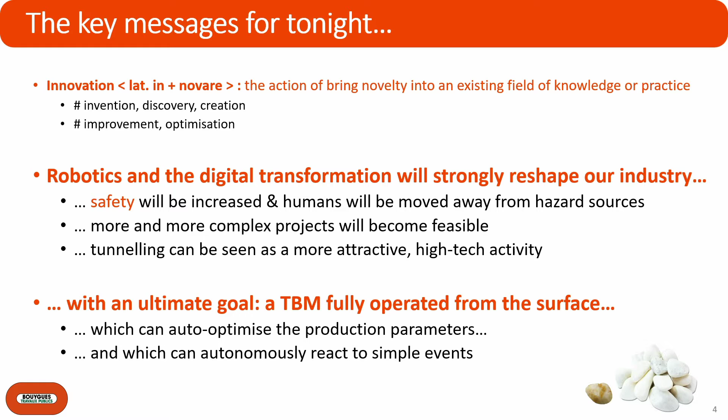When I joined Bouygues in 2009 in Flamanville on the nuclear power plant, there was one robot on site. One robot used to grind the concrete walls, to help the operators grind high walls. And it was like the robot. Everybody wanted to see the robot. It was the only thing that people remember from that site. Now, it can be seen that we actually have plenty of robots on site. It's becoming more and more common. So we will see the consequences of that evolution.

We will start with a bit of history, very, very short, but to show you that there is a continuing trend up to now of mechanization and industrialization of this industry. Then we will go through three categories of innovations. First, you cannot innovate if you don't have complete mastery of your core business, your core area of knowledge, know-how, etc. So we will start by improving all the tools that we've got now.

Then, the second kind of innovation, we will try and innovate using other technologies that already exist, but in other fields of the industry. A short break, we will go to Hong Kong, to see how we implemented that on the cross passages of the Cheung Sha Wan project.

And then we will go to another kind of innovations, which are more like breakthroughs or game-changing innovations, which will start a new field of research, of experimentation, because they bring something radically different. And I will give a quick word on the big data, which is kind of a trendy word now, but from this perspective of autonomous TBM, what it means for us in this very specific context, because many people are working on the big data at the moment, and some perspectives at the end.

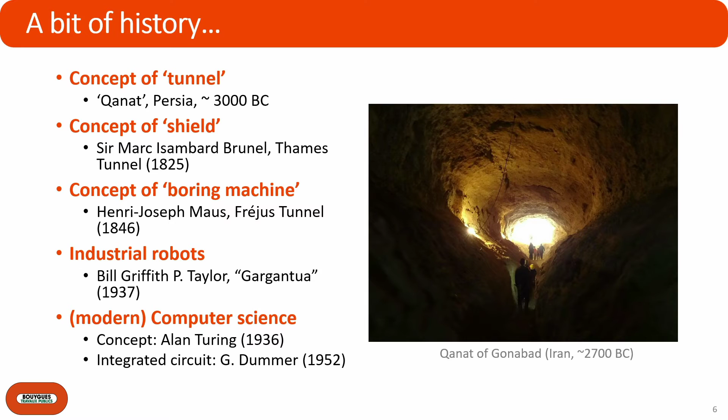If you look at the original shield, this is the well-known image from Brunel's shield for the Thames Tunnel. And another attempt at a TBM that was originally designed to go underneath the Mont Fréjus between France and Italy in the mid-1840s. You can see that our TBMs today are not drastically different. The concept has not changed much because the problem is the same. You need to support the ground, you need to progress, excavate, install a lining, walls, a roof, and stay safe inside.

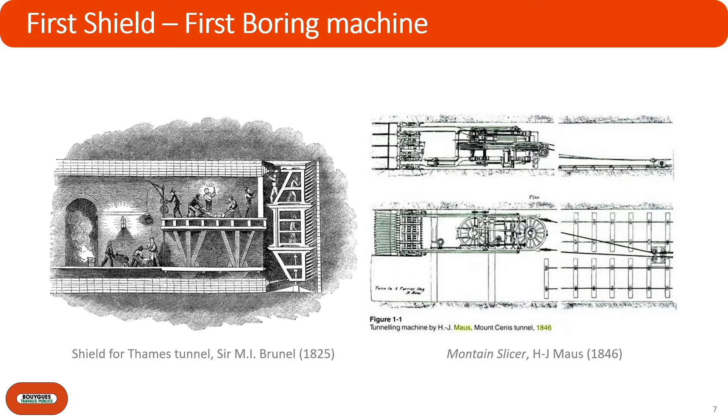In the domain of robots, the evolution is a bit more recent, but the trend is the same. This is a very interesting robot that was constructed quite a long time ago, actually, and it's the very first programmable robot, using the same concept as the player pianos with the paper rolls with the holes in them, designed to assemble bricks in a certain order and build a wall. We'll come back to that later in the presentation.

And for computers, a recent study has shown that the raw computing power of computers, I'm not talking about creativity or ability to learn, but computational power, is somewhere between the mouse and us. So, above the mouse, that's good, but it's getting closer to us. So it's a good time to ask ourselves how we can start working with robots that will be or are already as powerful as us, because we might be able to find a new way to share the tasks.

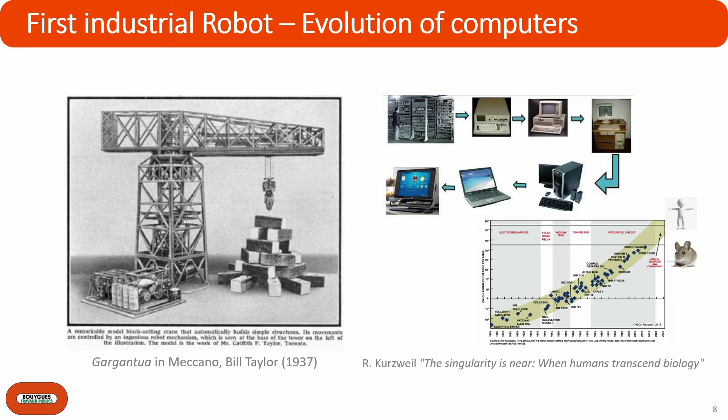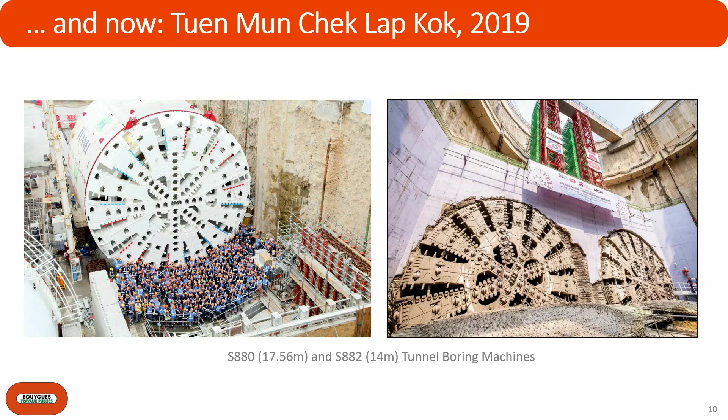Now, obviously, the scale has changed. The machines have become huge. You've all probably seen the S880 from Herrenknecht, and its twin, a sister TBM, which just completed their drives 5 months ago in Hong Kong. So the TBMs are much larger. They go much deeper in soft ground, and operating these machines has become more complex as a consequence. It's not anymore a guy sitting on an excavator. It's a real factory with all the equipment operated underground.

And if we want to continue the evolution towards deeper tunnels, larger tunnels, more complex tunnels, and try and reach under urban areas as well with the control of the settlements, we will need to keep on improving our machines.

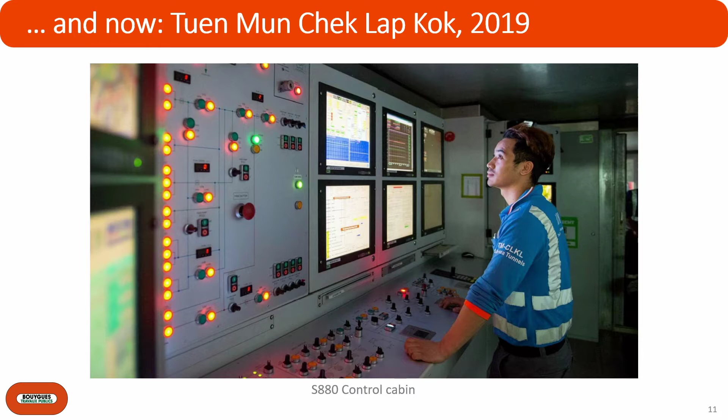So it's clear that our industry inherits from this very long tradition. Now the question is, how do we use or make the best use of the recent advances to make our TBMs better, or to help us with the operation of our TBMs?

The first kind of innovation is the improvement of our existing tools. To streamline the construction of the tunnels, we've developed over the years many tools, but it's important to keep them up to date so that they follow all the developments of the new techniques that appear continuously.

You will see a software suite, Pyxis, CATSBY, and SHIVA, I will explain later, and our cutter discs with the instruments on them, MOBYDICK. I will try not only to describe each and every tool like a catalog of all the innovations, I will try to explain to you why everything that we've developed over the past 30, 25 years can now be integrated in this quest for the autonomous TBM.

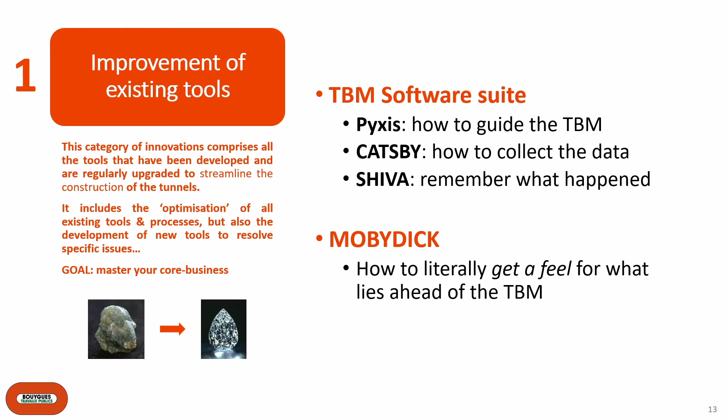The guiding system, it's very important to be able to guide the TBM because it's essentially blind when it's underground. So, what have we got? We have reference points at the surface and/or in the shaft, in the break-in shaft at the beginning, and then we need to rely on laser pointers, laser targets to guide our TBM.

The TBM is continuously moving, first because we intentionally make it move, but also because it has to react to the environment, to the ground. Sometimes it's pushed back by water pressure, pushed aside by a boulder, rock. You need to be able not only to steer it, but also to catch up with the theoretical alignment if the machine is not going where you would like it to go.

This Pyxis system, over the past 25 years, has been designed to help the TBM crew decide where to put the key segment. What I call the key segment is when you have a universal ring design, you have standard segments and the key segment with a taper. Depending on the location of the key segment, you can turn left, right, go up or down, or a combination of everything.

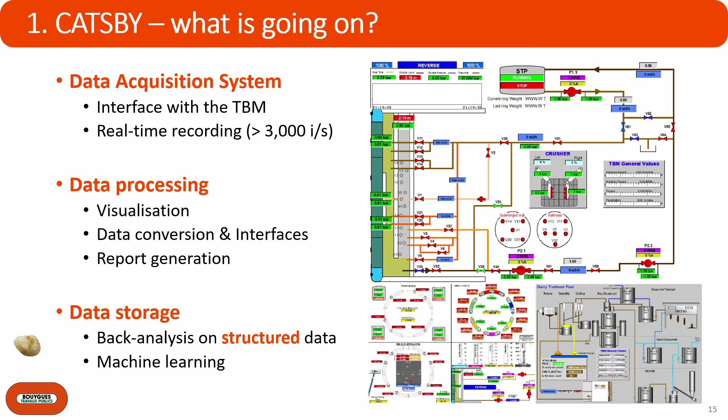This is the last bullet point here, the back analysis on structured data, so data in a standard format, stored always in the same manner for machine learning. We will come to that at the end of this presentation.

More and more the clients, the engineers, the designers are working with platforms or interfaces that make it easier to control or just to know what happens on site. So this data acquisition system must be able to give also human-friendly outputs, like for instance, where is your TBM? What are the main parameters that are used for the production? And generate as well reports, weekly reports, monthly reports at a certain frequency to know what is happening on site.

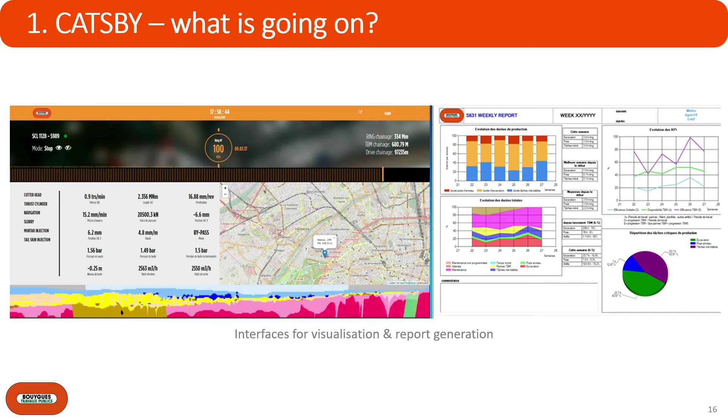Another example, you tell me why, but it's what happens during your shift. The shift, 8-hour shift, 10-hour shift, many things happen during the shift. And before, we asked the site engineer or the shift leader to write down after the end of the shift everything that happened in a notebook or on his computer, but it was written with his own words.

And not in a standard way, which made it very difficult afterwards to try and answer such questions as, for instance, what is the average duration of such a task, or average at what time do the crew members stop for, I don't know, the pipe, the extension of the slurry pipes, etc., because everyone was using a different language, sometimes even.

We decided now to use a tool that has a standard library of tasks for me to choose, and try and help as much as we can the people that just spend 10 hours in a tunnel, to make it as simple as possible for them.

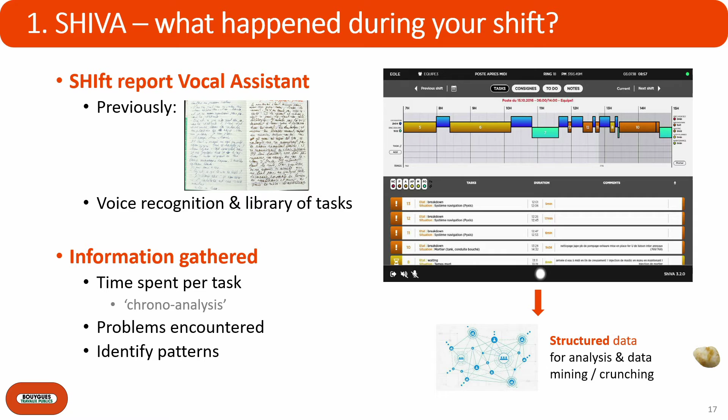But what is very important here, and also in the view of the autonomous TBM, is that a TBM, a machine, as intelligent as it can be, will never be able to use this. It needs something more structured and more standardized.

And lastly, for this section, the TBM is blind, as we said, or you have a class of technologies more using geophysics, I won't discuss that tonight. This is something else: it just literally feels the ground ahead of the TBM with instruments, so pressure sensors, temperature, rotation speed, force, etc., installed directly on the cutter disc, like inside the cutter disc.

And doing so, you're able to know, for instance, in a soft ground matrix, if you've hit a boulder, because when the cutter head is rotating, your cutter disc will see the ground, and you will see non-linearity or a change, a steep change in a value, which you need to explain afterwards. And since the cutter head is rotating 360 degrees, you end up having a complete mapping of the tunnel face.

In theory, it works well, and in practice, it works as well. We've used it also as a side effect.

We realized that it's also a good way to know the condition of the cutter head, because sometimes the value changes not because the ground is changing, but because your cutter head or your cutter disc is worn or worn out or damaged. So it is also a good tool for maintenance.

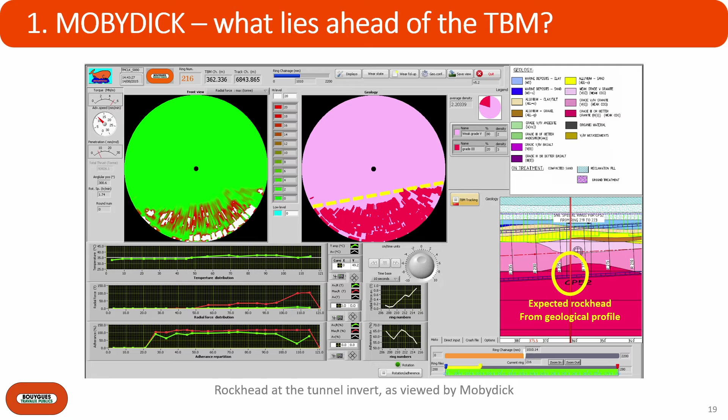So far, it was just improvement of existing tools. It's a first step, a very important step, because you cannot innovate until you're sure that what you do, you're doing it correctly. And what we've done here is not only improve our tools, but make our tools compatible, or ready, for the next step, which is autonomous machines.

Now we will go on to a second class of innovations, where sometimes the solution cannot be found in our own industry, and we need to look around in the neighboring fields of engineering and try to find solutions coming from others. I will take three examples of such innovations.

Some of you may have seen, even for the first ones, these names before, in other presentations, etc. I will try not to just do again a catalog of such tools, but just try to explain why now it will be integrated in a larger picture. Snake is a robotic arm designed to inspect and clean the cutter head.

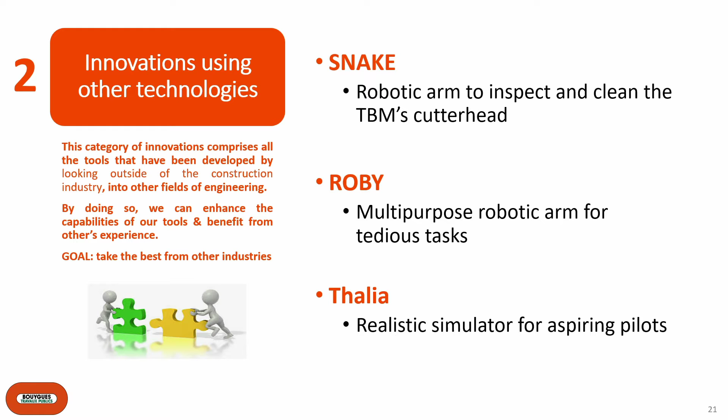Roby is a multi-purpose robot coming from the car industry that we use for tedious or cumbersome tasks. Thalia is our simulator that we have programmed to train our young pilots, TBM pilots.

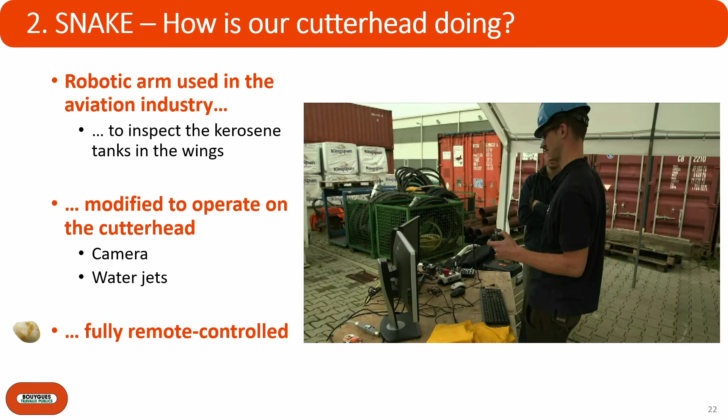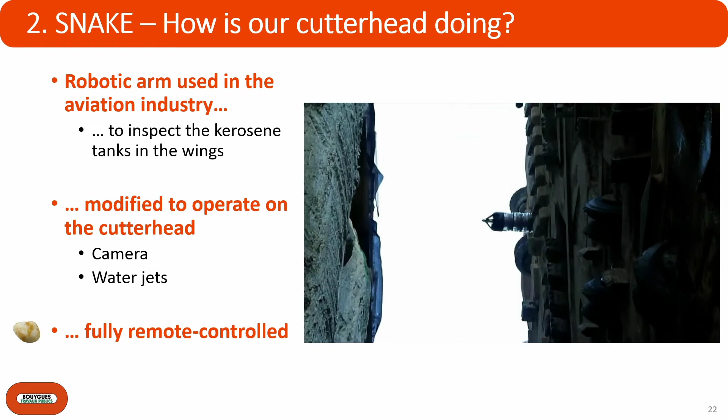Snake, those of you who have been involved in or interested in the Port of Miami project in the US, what was like 10 years ago, 8 years ago, have probably already seen Snake. It was our first real attempt at such a robot. We took a robotic arm that's used in the aviation industry to inspect the tanks located in the wings of the airplanes with the camera.

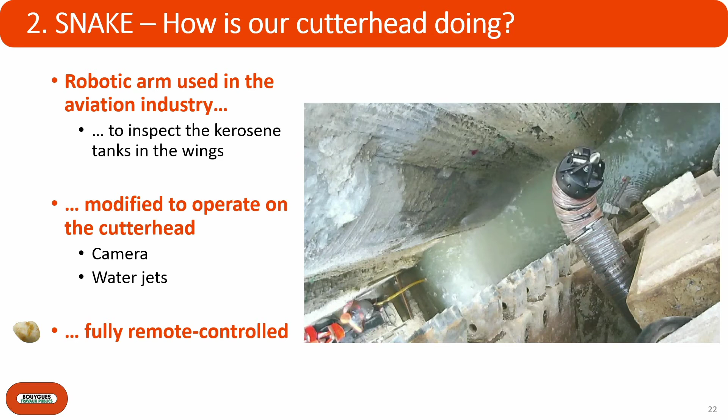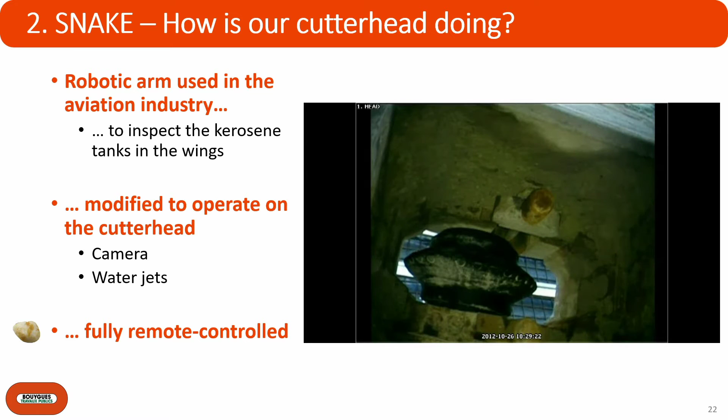This is before the break-in, so you can see the head wall. It's remote controlled, and it can go inside the cutter head chamber and also through the holes of the cutter head into the ground. The purpose of this robot was to inspect, see, check, and you will see in a minute, clean the cutter disc.

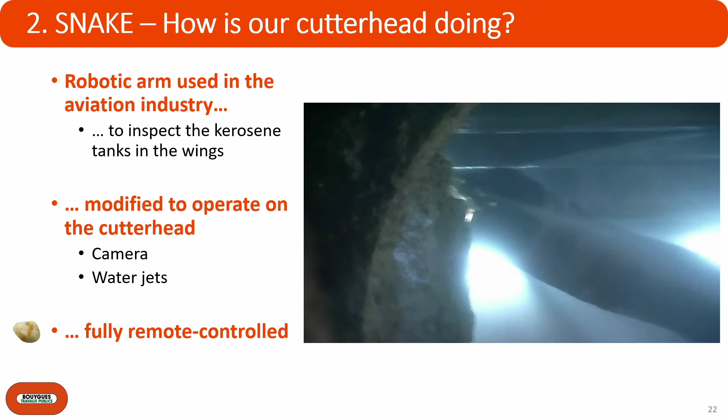It's equipped with water jets, 8 bar pressure, to clean or unclog the cutter head. And it's fully remote controlled from the cabin, which means that you don't need to send anybody inside the chamber to do this work.

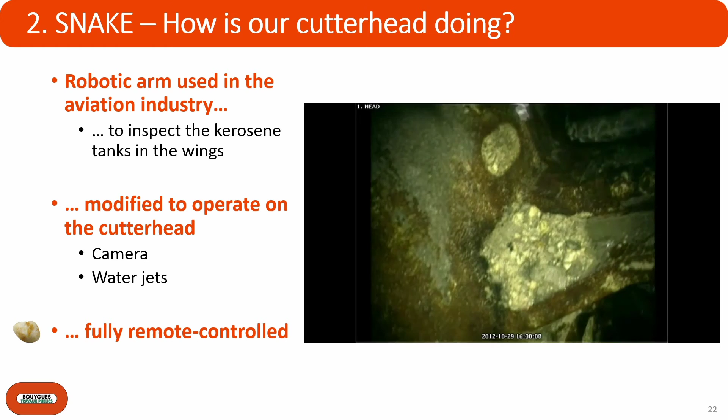A second example is Roby. This video here has been made on the Liantang project in Hong Kong. We had many holes to drill to install brackets. Using robots to drill holes is not new at all.

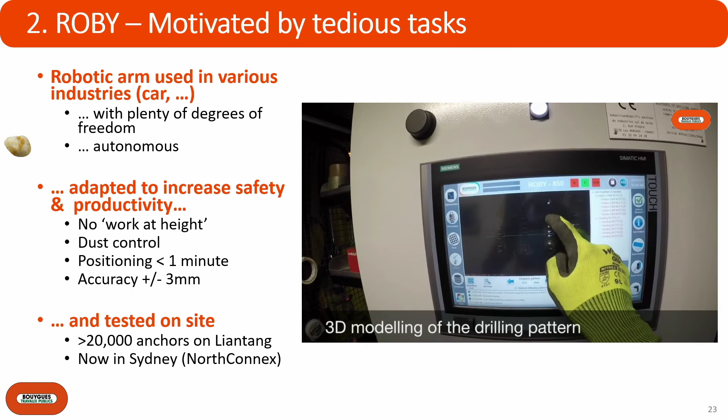What we wanted to do here is use a robot as autonomous as possible, which means that we wanted Roby to do its own survey first to know where it is, where it was. Then the drawings, the position of the dowels were input into the system, so he decided where to put the dowels.

Drilling, obviously, that's the whole point of having a robot, with absolutely zero human intervention. It's drilling the hole, sucking away the dust as well, cleaning the hole, and installing the dowel.

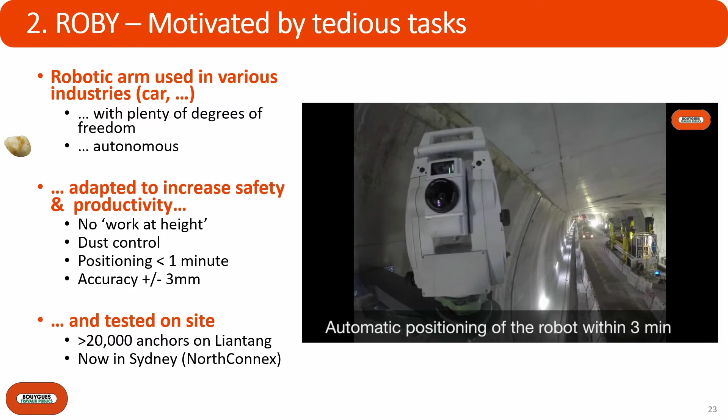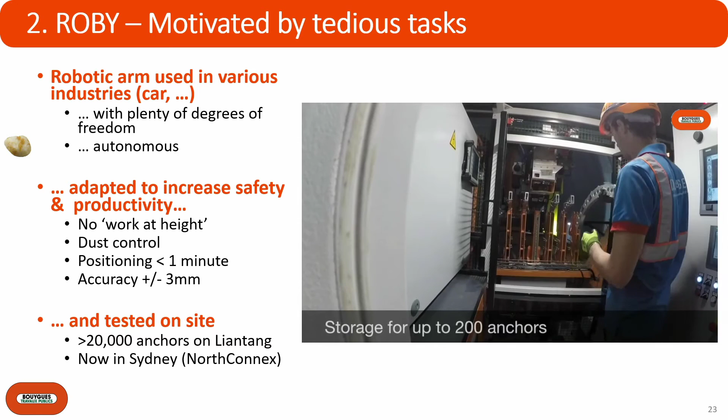In terms of safety, it's obvious that we have removed a work at height situation, and this task is not particularly motivating to do. The accuracy and the speed of the robot is comparable to or better than a human operator. The real breakthrough is that this robot never gets tired or never gets bored and just drills. We've done more than 20,000 holes on Liantang.

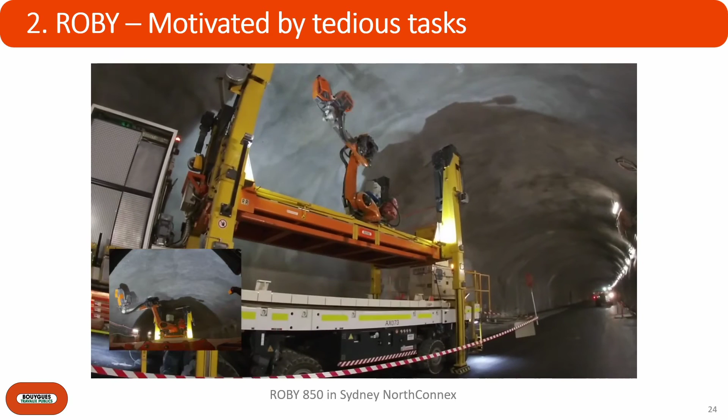The robot has now moved to Australia in Sydney for NorthConnex, the highway project in Sydney. In a different context, because now you see it's SCL mining, it's a traditional excavation tunnel with a shotcrete lining, but the concept is the same. If you need to drill holes, you just need to know where the anchors have to be, to tell ROBY where it has to go, and after that he will manage on its own.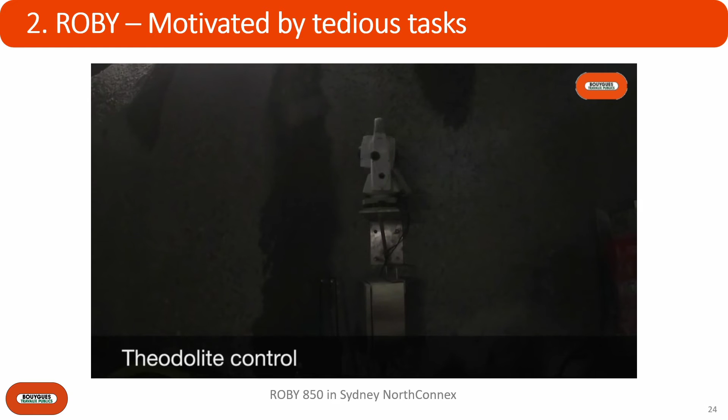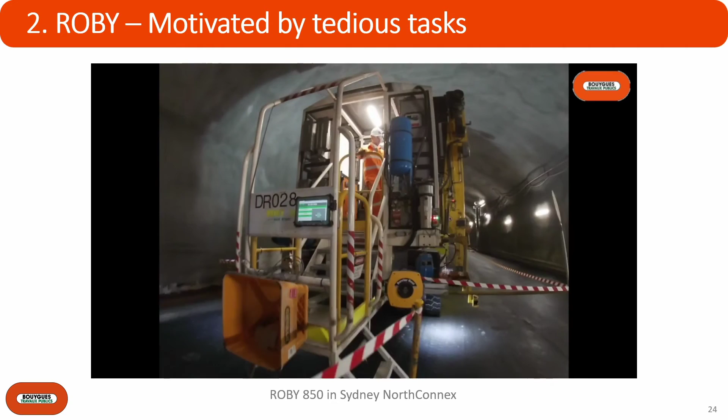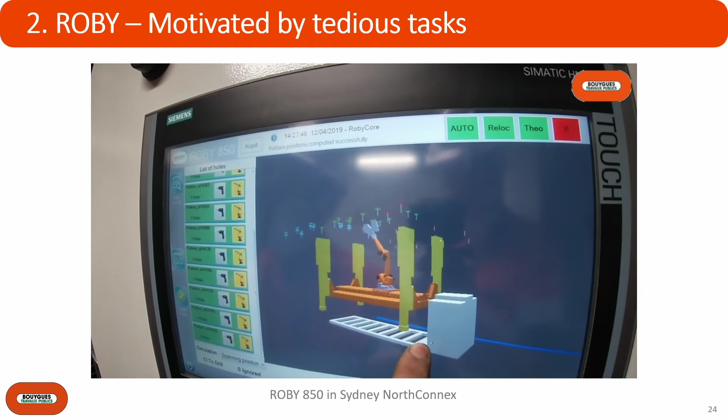A more general remark: when you need to compare productivity, it's not the productivity of the unit task. Drilling a hole depends more on the drill bit than on the robot or the human operator. But as a whole, if you have a robot, you save time on everything else - transition between shifts, lunchtime, dinner time, all the stops, etc. So overall, you go faster.

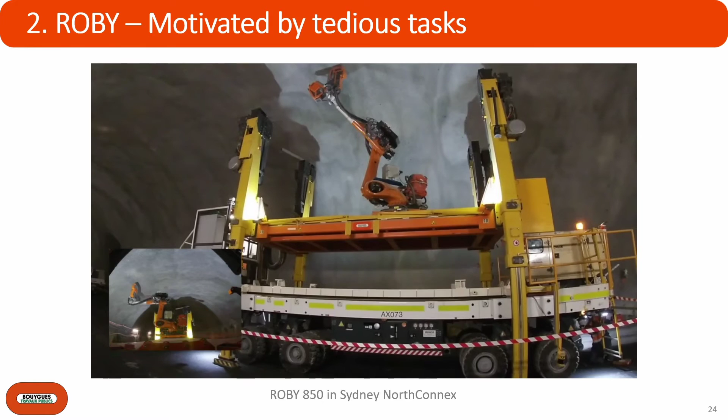The TBM simulator, again, this is an example of a partnership with a startup, a company specialized in simulation software for cars, planes, a lot of simulation software. We've asked them to help us develop a TBM simulator with a realistic command panel - by realistic, we mean very close to the actual one that pilots would have on a real TBM. Able to simulate all kinds of tunnel boring machines: earth pressure balance, slurry shield, slurry pressure, variable density.

Using, and that was very important for us, realistic scenarios - scenarios taken from our previous sites with the data collected by CATSB and all the tools that I've mentioned before, so that the training could be as realistic as possible.

A young pilot, before he's sent - especially now that we have a significant number of tunneling projects and not so many experienced pilots, so we need to train new pilots - will be able to get a first feel on how the machine is behaving, how you react to a certain event, etc., before he actually goes on site to operate a TBM.

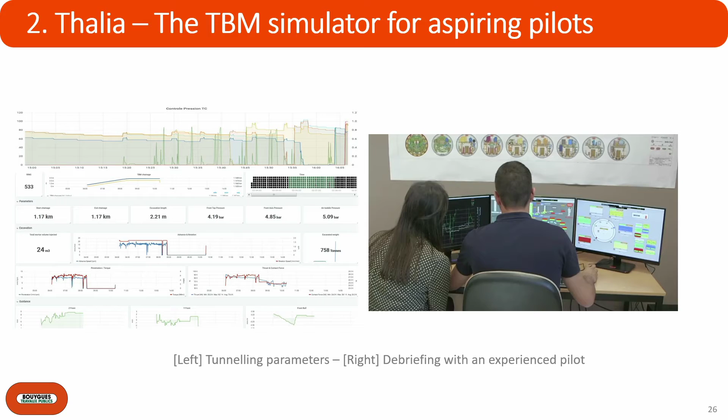So what are we seeing here? Sometimes we've taken from the outer world, let's say, ideas that we try to implement on a tunneling job. There is nothing new, there is nothing groundbreaking in itself here.

It's just that for a given problem, how do you find the solution that will best answer the question: first, improve the safety conditions on site, productivity as well, and be as autonomous, as industrialized as possible. And here, traditionally, the construction industry is a bit behind the other industries, so it's a good opportunity to catch up.

Now, as a short break, I would like to travel to Hong Kong and with you have a look at the cross passages of Tuen Mun. You've probably heard about the construction of these cross passages, because it was published and it's a good example of a situation where we didn't have any other choice than to innovate. And I will explain why in a minute.

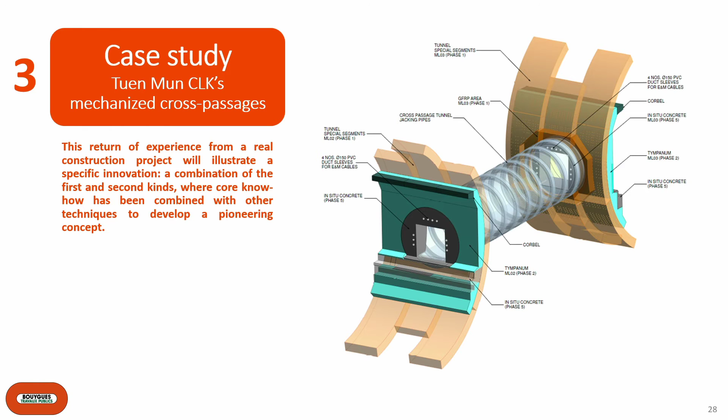You have two tunnels, and what I call cross passage is the structure that connects both tunnels for emergency egress of pedestrians in case of fire or accident. So, the context: Tuen Mun is a highway tunnel. You have two parallel tunnels from an extension of the Chek Lap Kok airport here to the New Territories at the north here in Tuen Mun. We had a significant number of cross passages because the tunnels are 5.8 kilometers long, and you had one emergency egress every 100 meters, which means 57 cross passages.

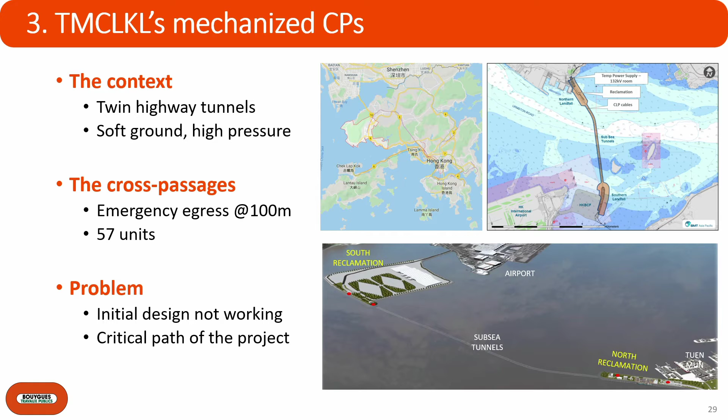And the problem, as you will see in a minute, is that the design that we had initially based our proposal on turned out not to be working. These are the two main tunnels with the carriageway, 2 lanes plus an emergency lane on the side, some equipment and ventilation underneath, ventilation at the tunnel crown, and cross passages.

So you see, we had quite a significant number, and the geological conditions are quite challenging. It's typical of Hong Kong. The bedrock is granite, but above that you have different layers of sediments, soft to very soft, highly permeable in this area, and up to 6.5 bars of water pressure below the sea. So two consequences. Below the sea means very, very limited access from the top. And second consequence, it's hopeless to pump, you know, dewatering.

So why wasn't the initial concept working? The initial concept was based on artificial ground freezing, which has been done before, which is a known technique. But when we sent the samples to the lab after the additional ground investigation campaign, it turned out that the mechanical tests, the uniaxial compressive strength on the frozen ground, was much lower than expected. I'm sure Stéphane remembers this bad surprise that we had when we opened the factual report.

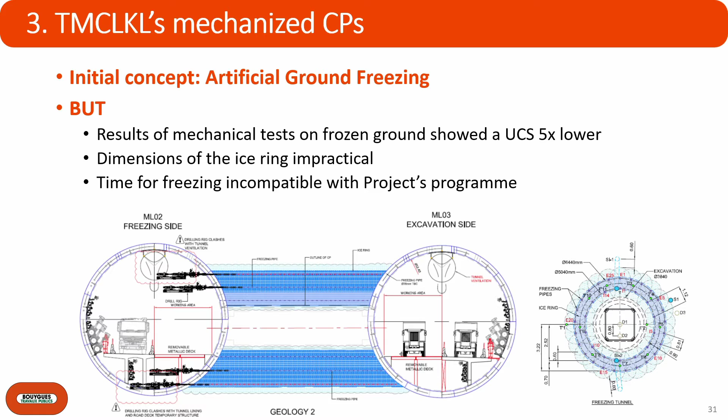Ideally, we wanted the temporary structures to be part of the permanent structure to avoid many operations of dismantling and reinstallation. And this is of paramount importance: we had to excavate the cross passages while the main tunnels were in operation, which means that we had to leave at all times half of the tunnel free for the logistics, for the vehicles feeding the main machines.

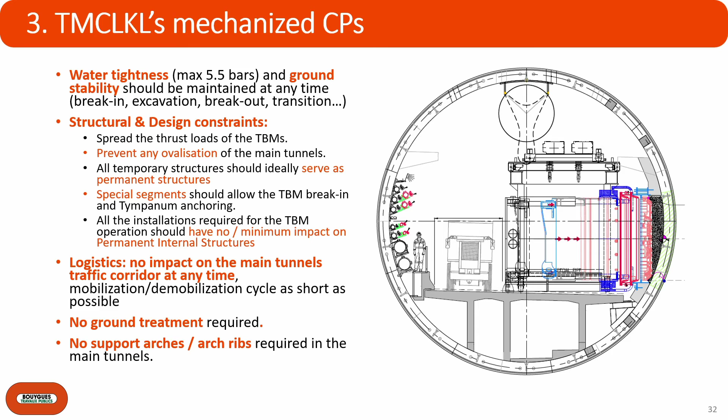So the new concept was, why couldn't we use the pipe jacking technique that is commonly used elsewhere, from shaft to shaft, for instance, but this time we could maybe use it from tunnel to tunnel. And the idea is to start from one side and push a pipe jacking machine, so a mini TBM, if you want, towards the other side, and retrieve it

in a steel bell under pressure, because here you have people working and you're under atmospheric pressure and you're connected to the surface. Here you're inside the ground, so you have your 5 bars of pressure on top in soft ground.

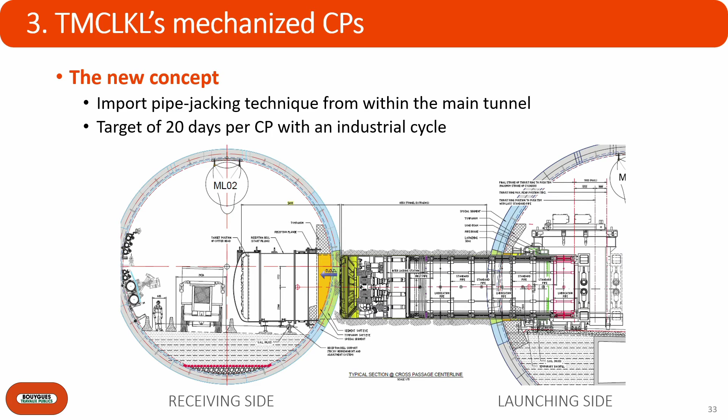What was the concept? So we had to provide a soft eye in the main tunnel lining. I will show that in the next slide, so that the pipe jacking machine can go through into the ground and on the other side as well.

And then to prevent or minimize the ovalization of the main tunnel, we decided to cast a reinforced concrete frame inside the tunnel that would act both as a temporary support and frame for the pipe jacking machine, which was anchored to this frame using 4 big steel plates to push the pipe jacking machine into the ground.

And the permanent lining of the cross passages was the reinforced concrete pipes themselves. So we said, doing so, we use all the temporary structures to already create the permanent cross passage at the end. What was really challenging, I won't talk too long about that, but the waterproofing system, because you can imagine that it's a junction point, and traditionally junction points are complicated to handle in terms of waterproofing.

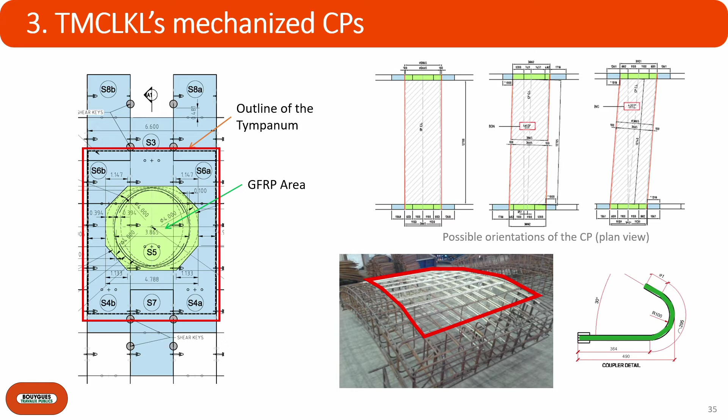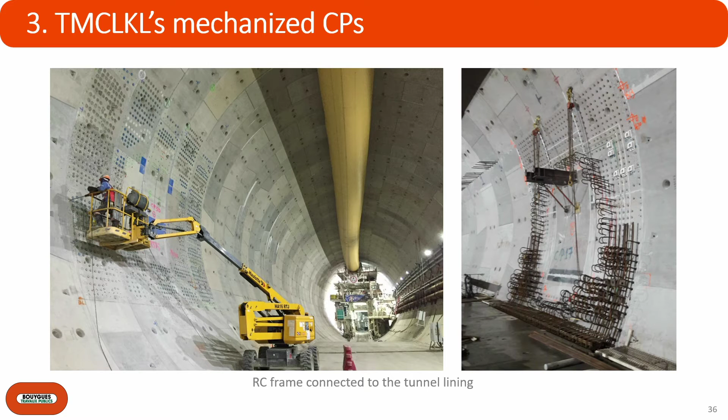CP. And we've used couplers embedded in the segments to connect to the structural frame, because we want everything to work together. Therefore, we had all these couplers embedded in the segments and pointing towards the intrados, on which we've connected rebars here and cast the frame. Here you can see the frame with the big plates. You have 2 out of 4. The big plates to anchor the pipe jacking machine. The flange at the first part of the steel structure for the pipe jacking operations.

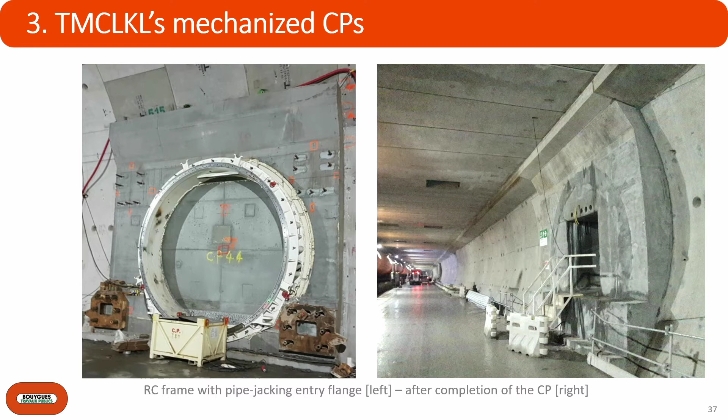The pipes, the concrete pipes, were brought using a flatbed truck, keeping at all times some space for the logistics. And the good thing with pipe jacking is that you have access to the tunnel, the cross passage, while it is being pushed or jacked.

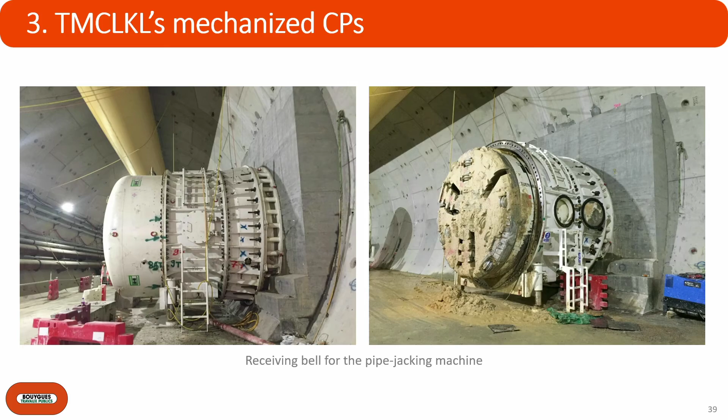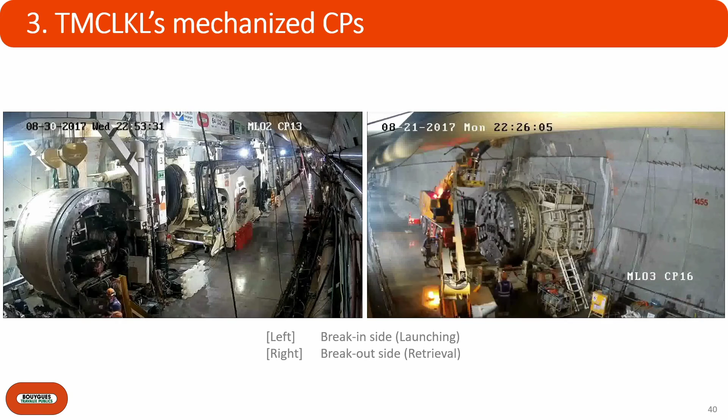And this was typically the case of innovation under constraints because we had, again, no other choice than to do something else than what was previously anticipated. So the innovation was more in the process, the assembly of bits and pieces from other areas into one solution.

It was made possible, now this is important, it was made possible through very sensible risk sharing with a motivated client. The client was in the same boat somehow because the solution was not working, but he needed his project done. So we came with this solution that had never been done before. We had some risks, obviously, and we had to convince him that we could manage those risks, that everyone had to do his best to take his share of the effort. And that's one of the key reasons why we were successful in developing this process.

As a result, we managed to do 42 cross passages with an average production cycle of 20 days, which is much faster than the 4 or 5 months that ground freezing would have required, with a record at 14 days. And we will use this technique on a new project that was just awarded recently in Hong Kong as well, which is called Trunk Road T2. Very similar project with cross passages every 100 meters as well. We will go for this solution as well.

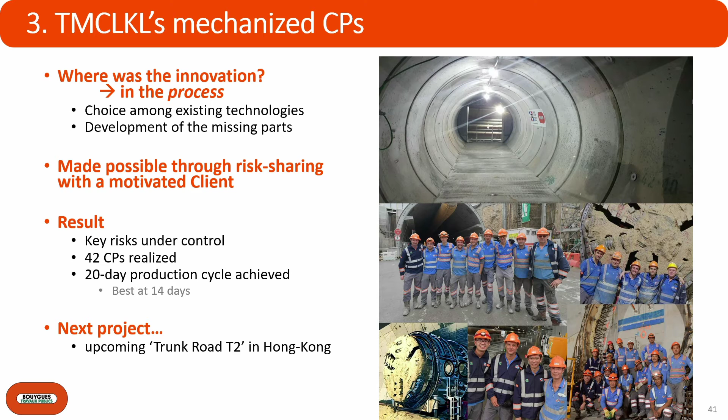So now back to our autonomous TBM. Now we will go to disruptive innovations, like breakthroughs or innovations of a different kind, innovation that will open a new field of experimentation and research. We will start with the continuous boring. By that I mean a TBM that is able to excavate at the same time as it is installing segments. It has been attempted before. I will discuss that in a minute. And it's feasible in other types of machines, but I'm talking about large TBMs for soft ground, slurry or EPB TBMs.

And two others, TELEMACH, a robotic arm to change the cutter discs without human intervention, and Atlas, the most recent one, the autonomous ring erection system. You will see that it has some similarities with the Meccano that we saw at the beginning.

Continuous boring, it has been attempted before. The limiting factor for continuous boring was the accuracy of the control of the hydraulic and oil systems for the thrust jacks and the computing time available on the machine. Because the main issue is that when you have your TBM in the ground, you will calculate the pressures in all your jacks so that it balances the forces coming from ahead, from the ground, from the water.

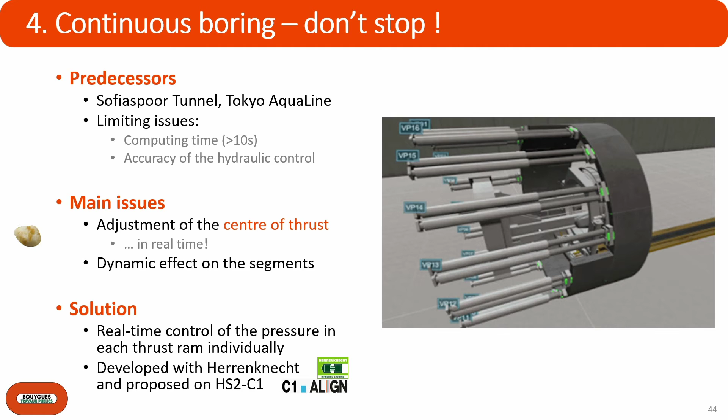It has become possible now because the computing time of the position of this center of thrust is now below a tenth of a second, where it was over 10 seconds 20 years ago. So now we can really speak about real time. So we can do that. And what is at stake is, in real time, you have your center of thrust here.

If it's on the bottom right-hand side, it means that I push more on the bottom right-hand side, so I want my TBM to go a bit to the top and a bit to the left. Okay? When I retract those two rams, I still want my center of thrust, the barycenter, at the same location, because I don't want my TBM suddenly to move in another direction, so I want to keep this, which means that I need to quickly calculate first the forces in the remaining jacks that are not retracted.

But not only calculate, we need to ask the system to change the pressure, the oil pressure, the hydraulic pressure, very quickly in those jacks. So it's not only just the computing time, it's also the accurate control of the hydraulic system. We'll see when the two machines on HS2 start. It will be a very, very nice field of experimentation.

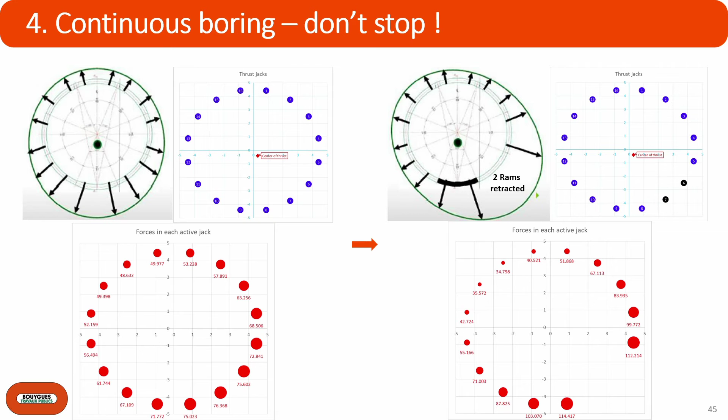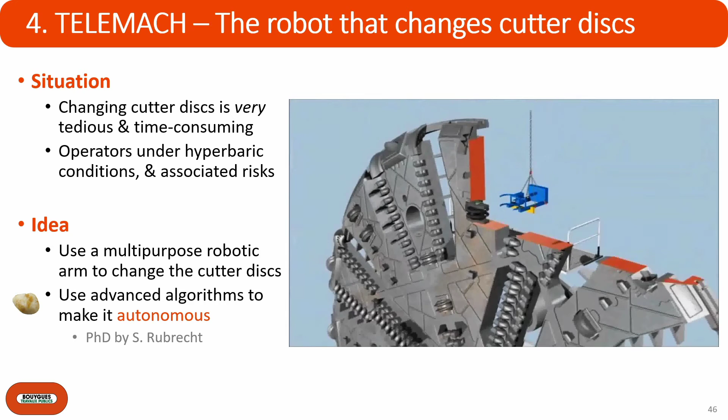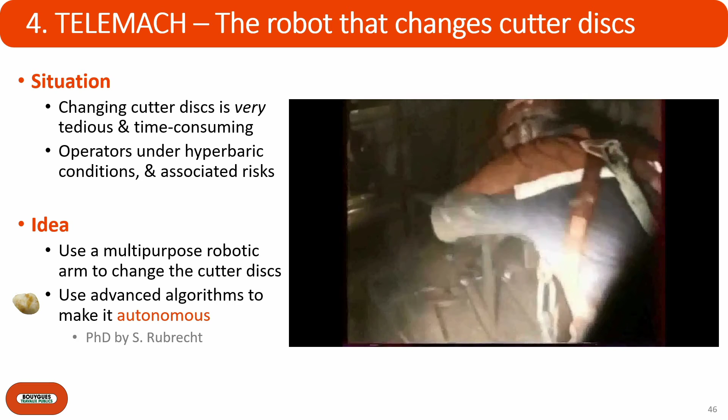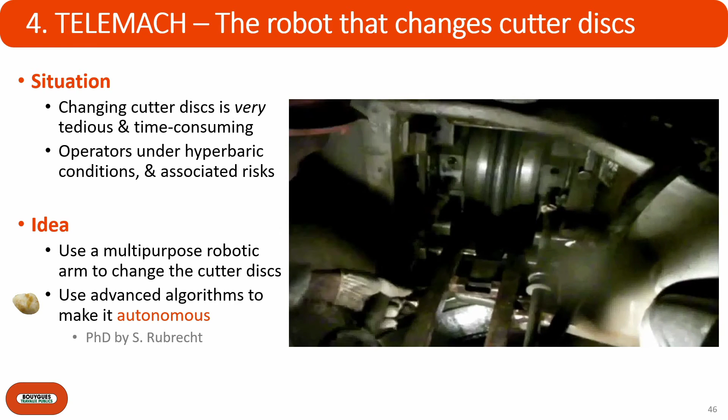Okay? That's the theory. In practice, it implies that you are working in the cutter head, so above 40, 45 degrees Celsius, humidity up to 100% sometimes, under pressure, it's a hyperbaric intervention, so 3, 4, 5 bars. You spend 2-3 hours changing one cutter disc. So when you have a full cutter head, so 80 to change, it takes a long time, even if you don't change them all at the same time, but still. So we say, okay, there must be a way to propose something else.

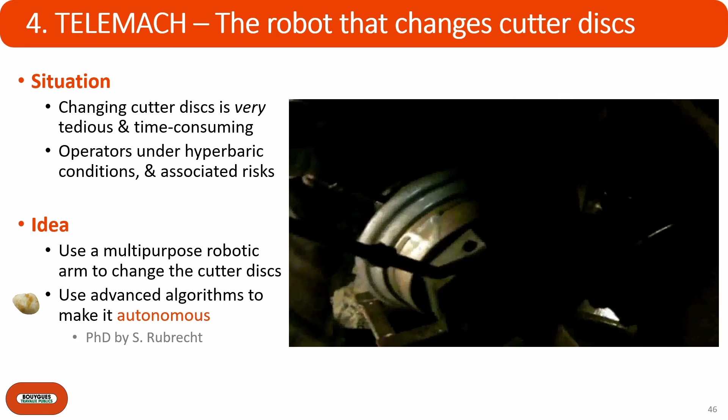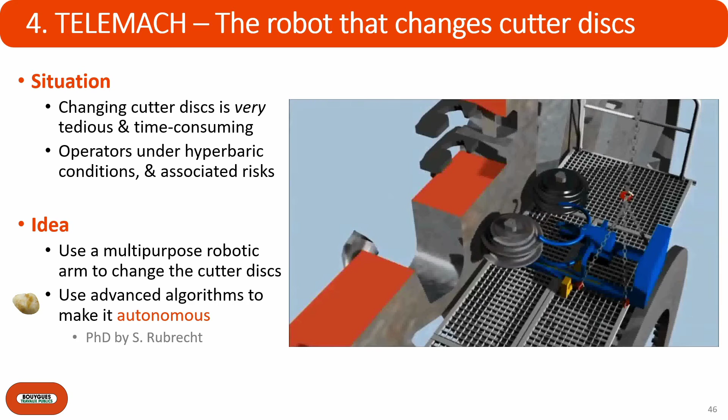Especially now, we like to remove, again, all the operators from risky situations. And a cutter disc like that can weigh up to 200, 250 kilos. So it's really hard work. What we've done, the robotic arm you've seen to drill the holes, we've taken the big brother, and we've developed something taking advantage of our machines being large

that is housed in a compartment inside the shield, the front shield, the front part of the TBM, able to go through a door, access the cutter head from behind, grasp a cutter disc, and replace it by a new one. So in theory, it's easy. It has to work in hyperbaric conditions, to be remote controlled from the control cabin under atmospheric conditions,

be ideally as fast as a human being, but if you manage to get all these safety improvements, you can tolerate that it's a little bit slower than a human operator, but the key improvements are no hyperbaric interventions, no people sent in the chamber, no work in confined space, and no handling of very heavy elements.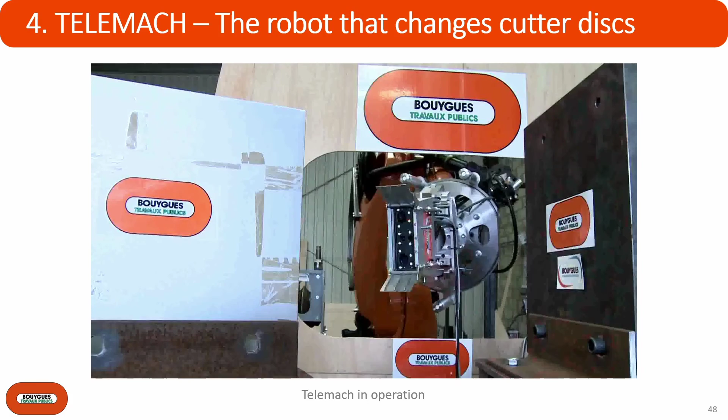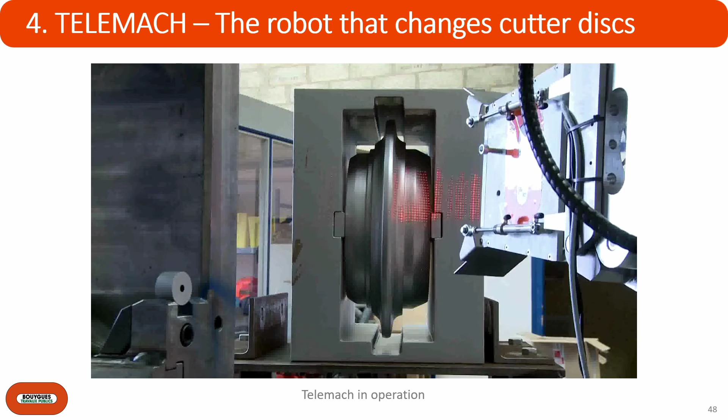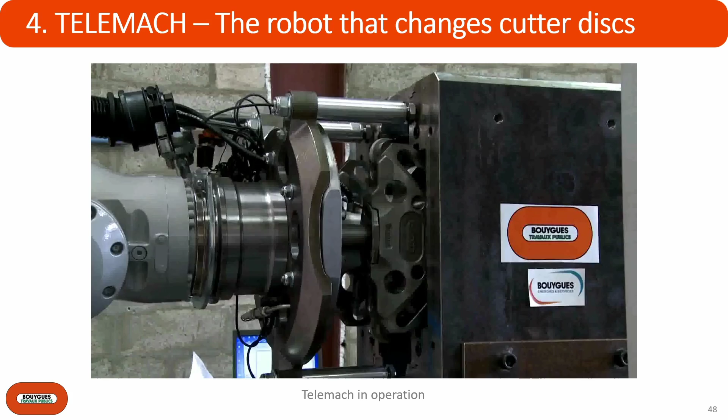This is the video of Telemach. This is in the factory during the commissioning, because in the real world you don't see really what happens, because to make the movie you would have to send ideally a person to make the movie, which is exactly what we try not to do. But you see the robot and all this study, the software, etc., takes advantage of all the latest technologies that we've got now. The BIM, the 3D models of the TBM, the cutter head, all the studies about kinematics and robotics, reverse kinematics.

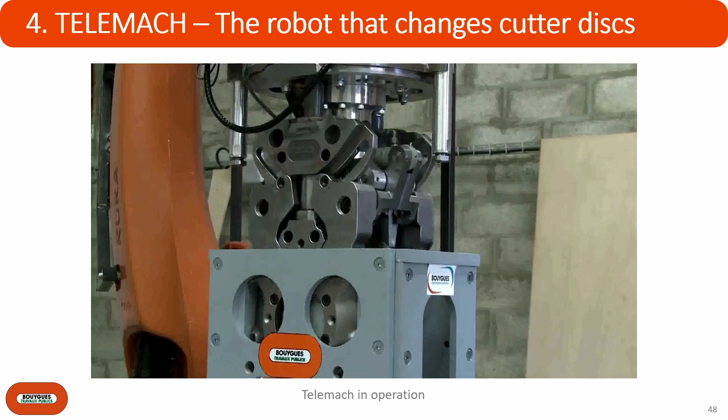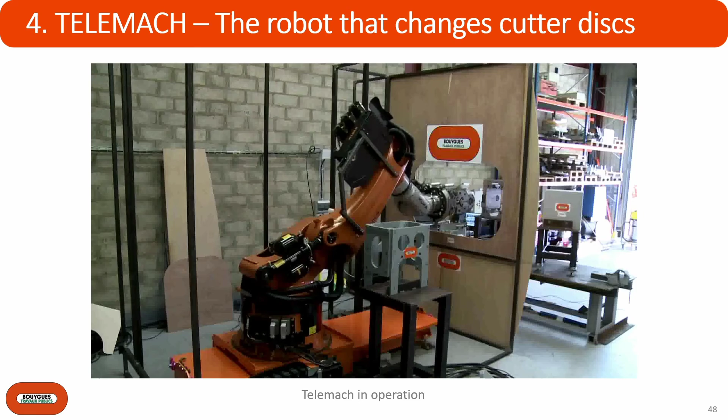So you don't control your robot by telling him, go to the left, go to the right, go up, go down. You just tell him, go there. And he will calculate with the position of the cutter head, etc., the best trajectory to arrive at its final destination. So virtually, you're just telling the robot, change cutter disc number 87, and it will manage the rest.

For that, we also had to develop a new cutter disc, because the cutter discs that I showed you in the previous video, suitable for manual handling, are not suitable for a robot. Therefore, we developed a cutter disc that is a bit more complicated, a bit heavier, but it's not a problem since it will be handled by a robot.

And the last innovation for today: we've talked a lot about excavation, the tools, the cutter heads, etc. What about the segments? Because a significant amount of time is spent erecting the segments. This is a video from the XRL820 project in Hong Kong, which was completed in 2013.

It was a standard erector, so remote control, with an operator here, who will just check that the segment is put in its correct position, check what we call gap, step, etc., orientation, and make sure that the lining is of good quality. What are not the issues, but the areas of improvement?

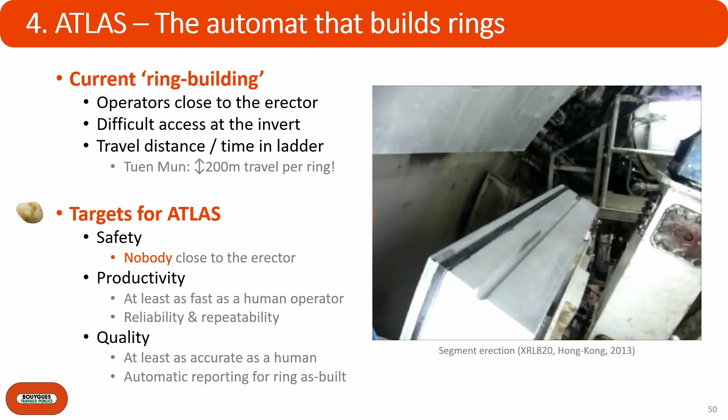The targets for Atlas were, in terms of safety, we wanted nobody close to the erector anymore. In terms of productivity, we don't want to lose time, obviously, so it has to be as fast as a human operator and as reliable. And in terms of quality, at least as accurate as a human.

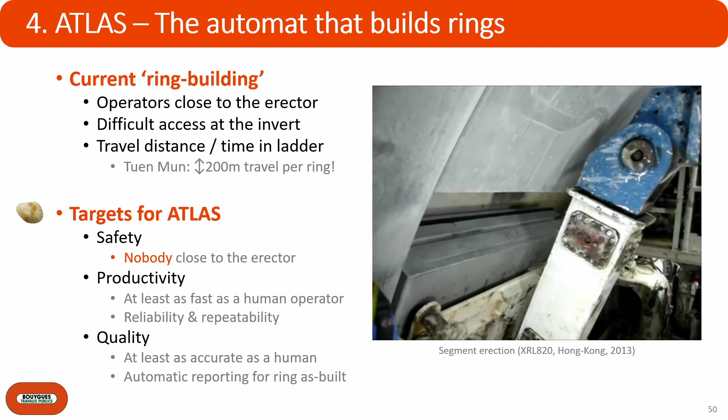It might seem strange to have a robot only as accurate, but actually, for example, a step between two segments, it's very easy to feel it with your hand. And the touch is very good at feeling very, very small differences. So a human operator is very good at ring building because it's easy to correct the small defects. So we want a good quality.

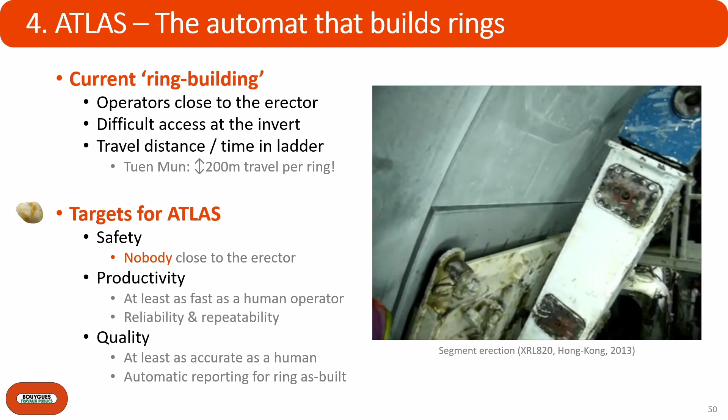And we said, okay, if a machine is doing the ring building, then we would like, during the ring building, to do the as-built at the same time, not send surveyors the day after or 2 weeks after, etc., to survey the ring. Take advantage of it being a machine, very accurate, as you'll see, to do the as-built straight away, straight after the segment has been placed.

The result is Atlas. At the moment, it has been installed on the EOLE project, part of the Grand Paris in France. Right now, it achieved 34 minutes per ring, so on average, 4 minutes and a half per segment, with a record at 3 minutes. A human operator is consistently between 32 and 36 minutes per ring. So it's as fast as an operator.

At the moment, it's not yet as reliable, but the target is to save 1 minute per segment and have a real gain in speed.

How does it work? Again, you have in 3D your TBM, your segments, the theoretical position of your segments. You have everything you need in a digital format. You just need to give, in a way, eyes or senses to your TBM, to the erector. So we have a number of lasers. You will see a video on the next slide. Lasers that actually look at the segments that come from the back, on the segment feeder, as it's called, this conveyor.

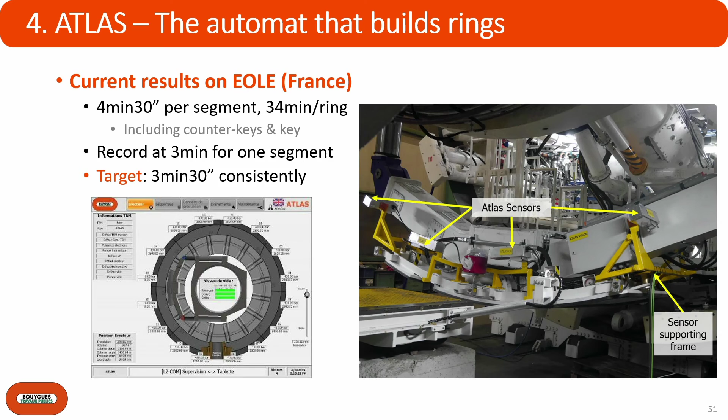On the left-hand side, this is the view from inside Atlas's mind, so it's the virtual representation of the tunnel that Atlas works with. On the right-hand side, this is Atlas actually working.

You see the lasers and the sensors installed on the erector.

We had to make a couple of adjustments on the design of the rings to make it suitable for Atlas. For instance, you will notice that we are no longer using segment bolts on our project. We've recently removed them from HS2 as well, from our project. We use dowels embedded in the segments. So once the segment is in place, they will stay forever, and they play exactly the same role as segment bolts, except that you don't need to send someone to bolt them and remove them at the end of the project, if required. So now we only have dowels, and also they act as centering pins to help Atlas install the segment at its location.

This has been made possible also because with the TBM manufacturers, we have worked together to integrate the machine in the 3D model, because obviously you don't want to hit the jacks or any other part of the TBM equipment with a heavy concrete segment.

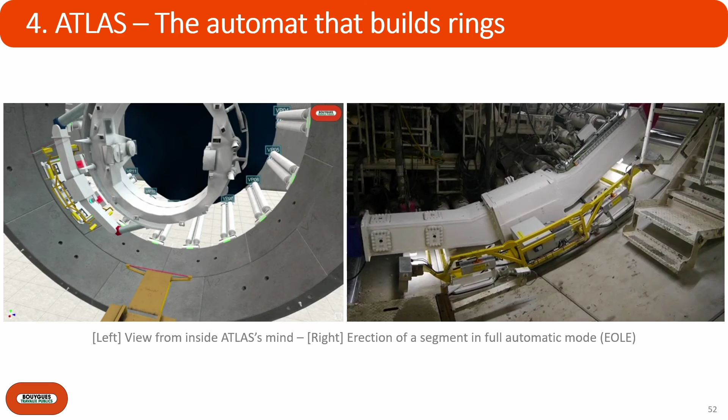So for those of you who are interested, feel free to go and visit EOLE or other projects. It will be a technique that will be tested all along the project there. This was for hardware, let's say, innovation in hardware, in tools, TBMs.

What about the software now? A very quick word on the big data. We are collecting a huge amount of data on our sites, as you know, and it's not only us. It's a general trend in the construction industry to have colossal amounts of data.

The thing is, now it's a very nice playground for all the new class of algorithms that have emerged in the past 5 years or so. Machine learning, you've probably heard such a term. Artificial intelligence is very broad, but this is the category of algorithm where you just feed the machine with raw data, but you don't guide the computer. You just tell it, try and find patterns, correlations, relationships between the variables on your own, and just tell me what you found afterwards.

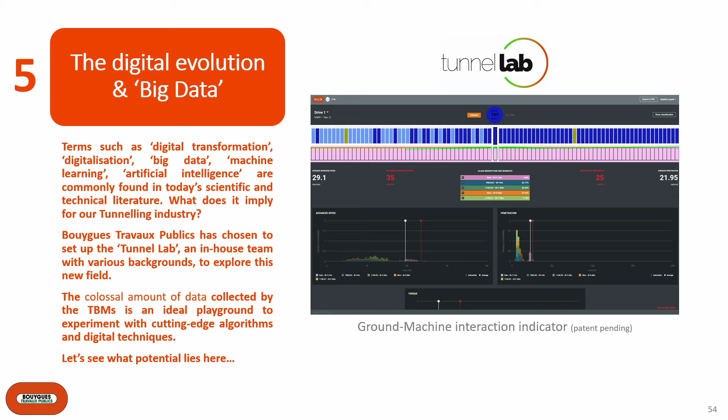On the right-hand side, I will come back to that in a minute. We are developing a tool that we call the ground-machine interaction indicator, which is precisely working with this paradigm. We give the algorithm all the collected data, and we ask the computer to classify, to sort them, and to try and find relationships between all these values. On EOLE, for instance, we are collecting more than 7 gigabytes per day.

Which means that over a 3-4 year long project, we will have immense quantities of data. We have an infrastructure dedicated to big data in partnership with Microsoft, with a dedicated computing platform, because this will not run on a typical desktop computer, obviously.

What you want to do is you ask your computer, okay, try and find some pattern. Sometimes it will find obvious relationships, such as, for instance, hey, I've seen that the force on the cutter head is equal to the pressure times the area. So you say, okay, good. But the thing is, it's an indication that it works, actually, because this relationship is obvious to us, but it's not obvious for a computer that is kind of discovering everything. It won't have the mechanical engineering background to know that pressure times area equals the force.

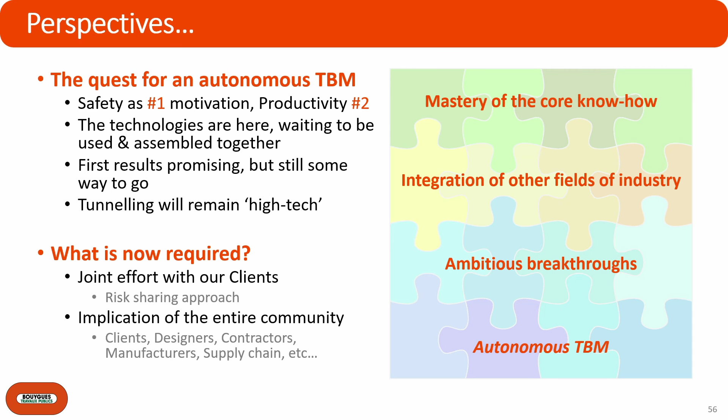What is now required is a joint effort with all the tunneling community, clients - because as a construction company we can do nothing without our clients given the risks. Because it's innovation, so by definition you have inherent risks coming with the innovation. And also an implication of the entire tunneling community - suppliers, supply chain, contractor, designer - everybody has to cooperate or work together to reach this end goal.

Thank you for your attention. I hope I wasn't too long. It was too long. Thank you for your attention. I don't know if you have questions.

Yeah, please, other questions. I think after that you'll be getting a massive influx of visitors to EOLE. So I hope so, be prepared. Can we have somebody on the microphones, please? We've got microphones. First question, then. Oh, at the back there.